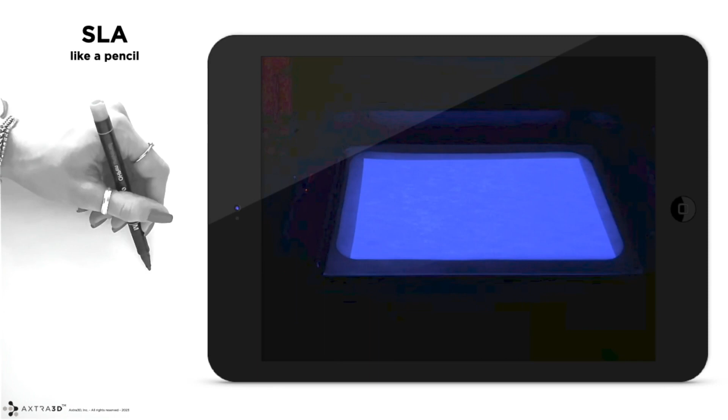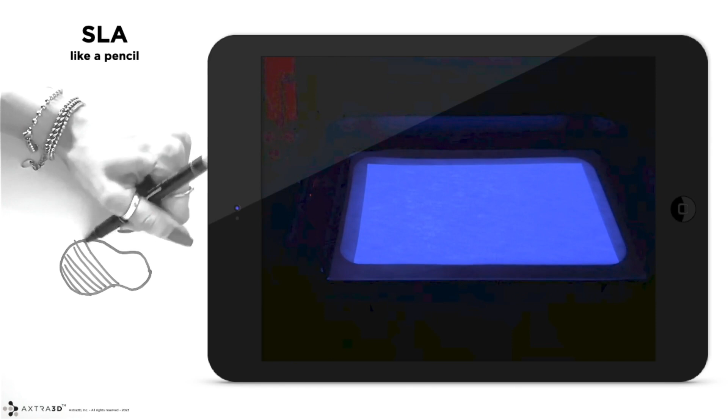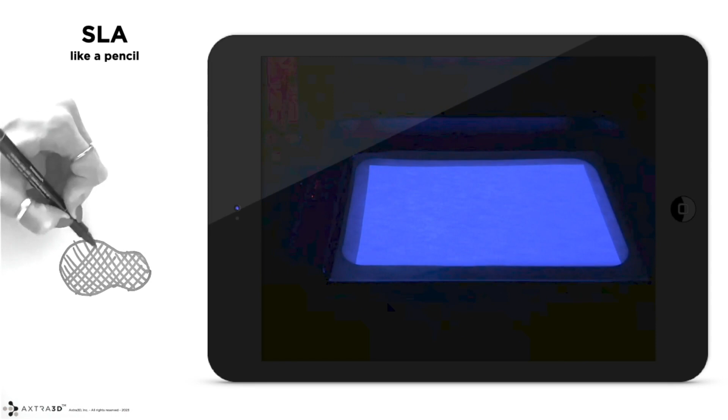Well, what is the meaning of the SLA technologies? Exactly like a pencil, we are using a laser to cure the entire layer. Which is the value of this technology adopted today? An amazing technology: we can use the laser to generate the contour of the layer we want to generate. What does it mean? That, exactly like a pencil, we can draw the contour, obtaining what you will receive in your hands, the surface of the 3D printed parts.

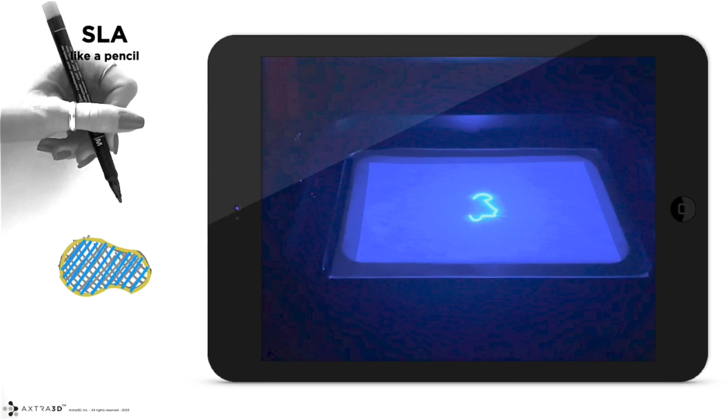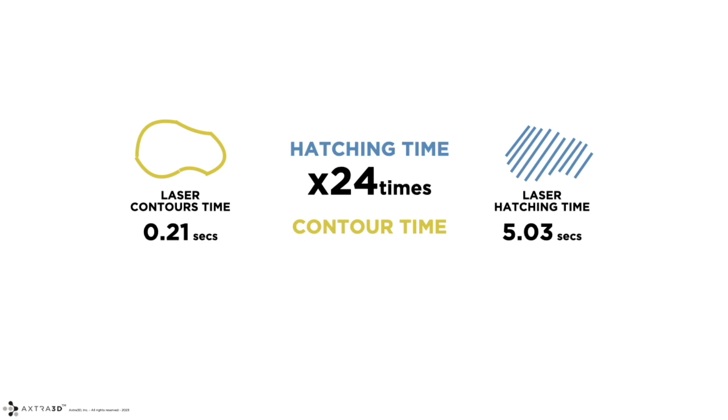But having only one light source, you are also obliged to use the same pencil, the same laser, to hatch the cross-section of your parts. The effect is that you have to spend a lot of time to generate your layer. This is a pretty important example. To cure this cross-section, you are spending 0.21 seconds to generate what you will have in your hands, what you will see, the surface of your printed parts, and you are spending more than 5 seconds simply to hatch the cross-section of your printed parts.

Well, you know very well, roughly 10 years ago, the 3D printing world introduced a completely new light source to cure the layer, what we call today DLP printers. DLP is a simple projector. What does it mean? That we are using this optical device to cure in one shot, only in one shot, the entire layer.

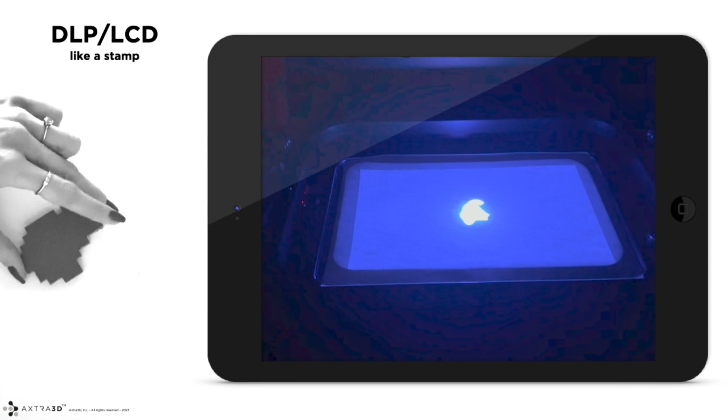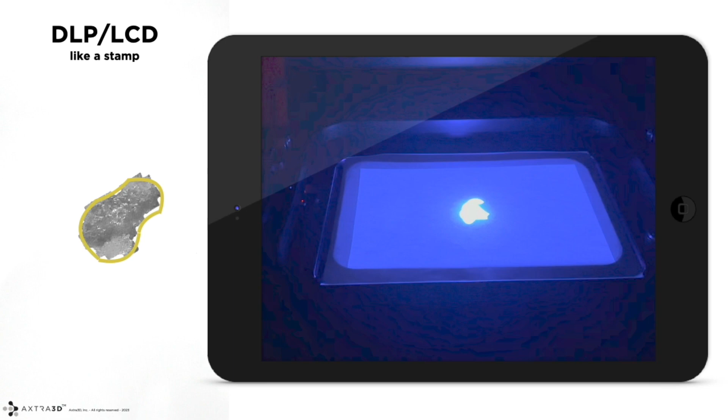Which is the value? First of all, a technology like this one we can call volume invariant. What does it mean? If you print only one part, or if you print more than one object on the same platform, the printing time will be the same, simply because you're using only one flashing phase from the projector, or today also from an LCD technology. Which is the problem? In general, the yellow line is what you want to obtain, but you are projecting pixels. So you are projecting a digital image. What does it mean?

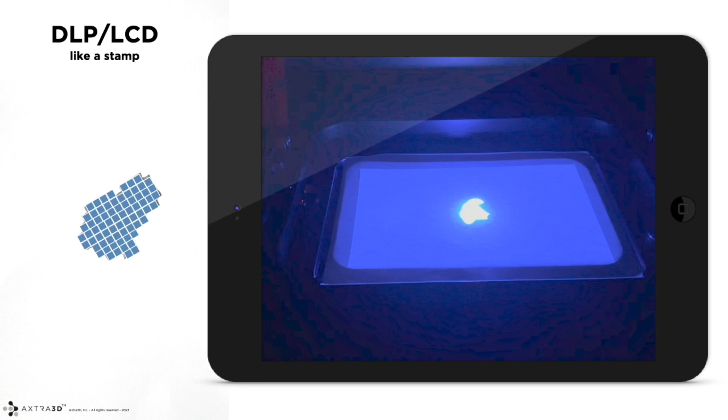The real effect that you will see in your hands is the pixelization of your surface. Of course, you can increase the resolution of your system, reducing the pixel size you are projecting, but on the other side, you are also reducing the final building area. Today we're seeing adoption of new projectors, 4K pixel shift projectors, or real 4K projectors, maybe tomorrow 8K projectors, but in any case this is a compromise that we have to accept.

On one side, in general, we have SLA technologies, a laser-based technology with an incredible resolution, with an amazing surface quality and part finishing. Also, the junction points using those technologies are extremely thin, simply because you can use a laser and the spot size of the laser is so small to generate the layers. But of course, those technologies are extremely slow.

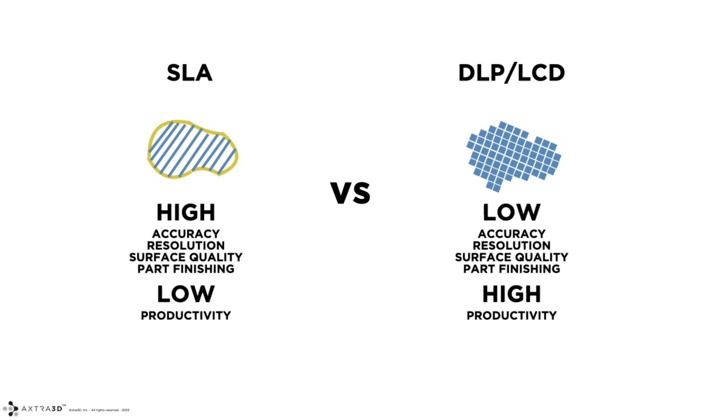On the other side, DLP and LCD technologies are extremely fast. So the productivity in this case is 10, 20, 30 times higher than a standard SLA technology, with the disadvantage that the resolution, the surface finishing and the part quality are lower than what you can obtain with an SLA technology. And another point, you also have to accept a compromise in terms of building area. Increasing the building area, you are simply losing resolution because the pixel you are projecting is bigger.

A couple of years ago, in 2021, we introduced a completely new light source, what we are today calling HPS technology, hybrid photosynthesis technology, and our LED engine. And this is the effect on 3D printing. This is for sure the most important slide that we will share together today. On the left side of your screen, you are seeing an SLA technology. Between two monitors, you will see the layer that we want to cure with, on the left, a standard laser, and on the right side, our new HPS technology.

So let's start curing absolutely the same layer, in this case simulating a really common resin on the market. We are speaking about roughly 3.5 to 3.8 seconds of curing time in a standard DLP technology. And you are seeing on the left side right now the scanner, the laser, curing, having the same effect on the polymerization, curing the layer, or at least an entire platform of objects that we want to print.

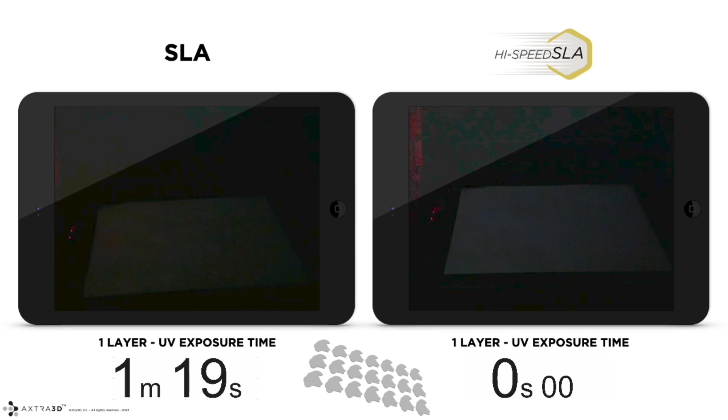As you can see, we are simply waiting, but the curing process, and only the curing process, is extremely slow, simply because we are using the laser not only for the contour, but also to hatch the cross-section of our parts. Now, on the right side, in a few seconds, you will see our new LED engine in action, curing the same layer, simulating the same resin.

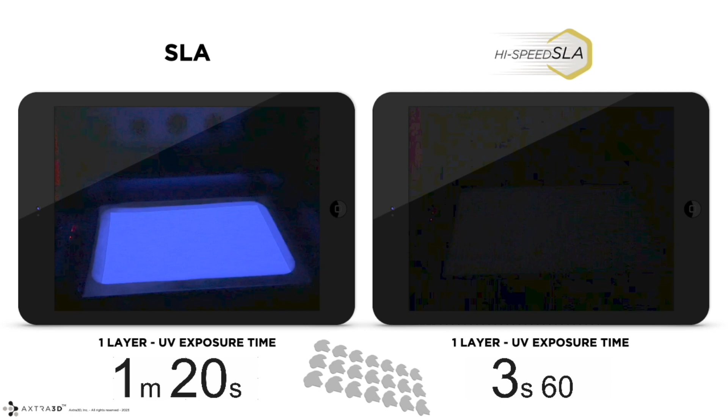So we are speaking about roughly 80 seconds for a standard SLA technology, and, following the curing time of this resin with a DLP projector, 3.6 seconds with our new HPS technology. That's the reason why we call this evolution of our work the end of trade-offs. Why? Because in general, with an SLA technology, with a laser, you can achieve an amazing quality, but the productivity of your device will be extremely low.

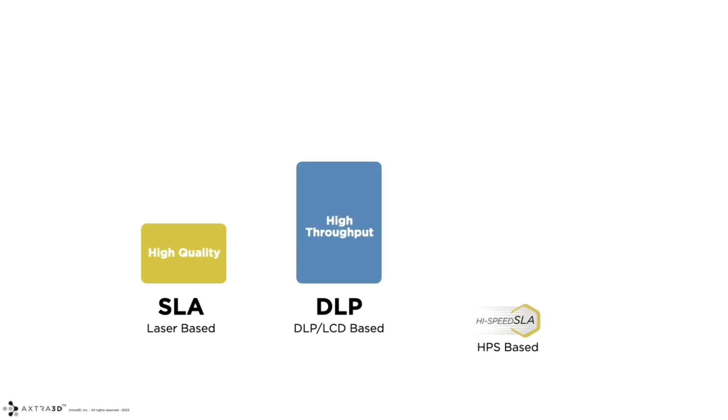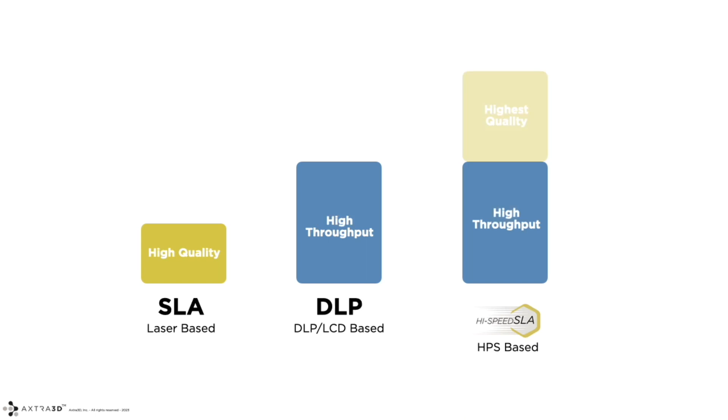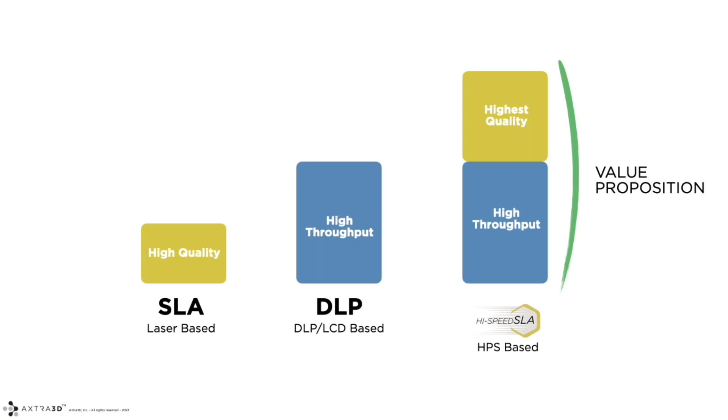On the other side, DLP: absolutely fast, the fastest printers on the market today, but low resolution devices. Today, with our HPS LED engine and our new high-speed SLA technology, we are combining both advantages: the highest quality, and you will see why the highest quality, better than an SLA technology, with the same throughput of a DLP system.

Now let's start entering into the description of our LED engine, of our optical device, and that's the reason why we're calling it why, not how, our LED engine works. In general, the idea to combine two light sources, obtaining both advantages, is not so new. For at least 10 years, a lot of inventors have tried to combine both light sources using two different strategies.

The first one is this one. What does it mean? That you can use the first light source, for example a projector, to cure the cross-section in one shot. And after that, using the second light source, a laser in this case, to cure the contours and obtain the best surface quality.

In general, this technology doesn't work, for two reasons. First, because you can't create the right crosslink curing the contour and the cross-section in two different moments. You can't obtain the right chemical crosslink between the contour and the cross-section.

And also the complexity in there, for example, using a mirror at 45 degrees to combine both the light sources with resolutions under 20 microns is a real challenge. So also the mechanical complexity is a real challenge.

Well, let's start describing how our technology works. This is a slow motion of the technology. As you can see, we are delivering in a real coaxial system both the light sources simultaneously with the same wavelength. As you can see here, now also the color. In this case, this LED engine is developed at 405 nanometers, simply because this is one of the most extended portfolio materials today on the market. But what you are seeing here is the HPS technology in action.

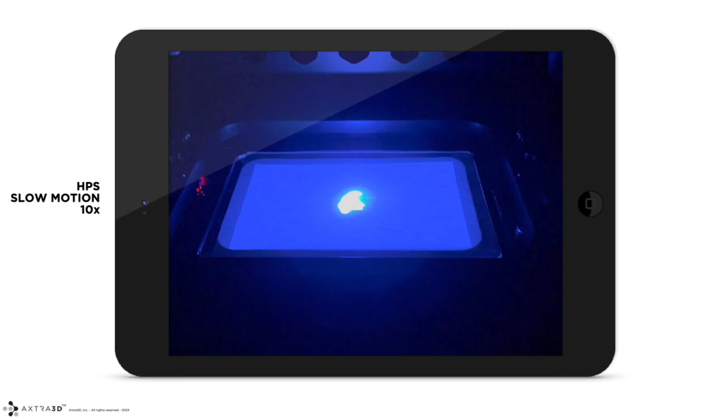So we are delivering simultaneously at the interface in a real coaxial system without, this is extremely important, without motion of mechanical components. We are able to deliver both the light sources at the interface using a very specific behavior of the light. In our case, it is very well known today, and I'm so happy to say that today our patent is a granted patent. We are using the polarization of the light to obtain what we are calling HPS technology.

What does it mean? That again, using a very specific behavior of the light, we are able to deliver at the interface the polymerization under the VAT in this case, but it's extremely clear that our technology and our light engine can be used for both top-down and bottom-up systems with different wavelengths, with different building areas. We are implementing a real coaxial system where our components are completely fixed, and that's the reason why we are able to combine both the sources with a resolution under 20 microns.

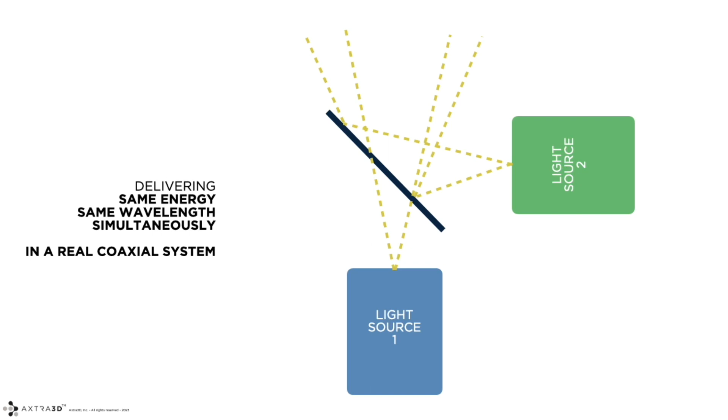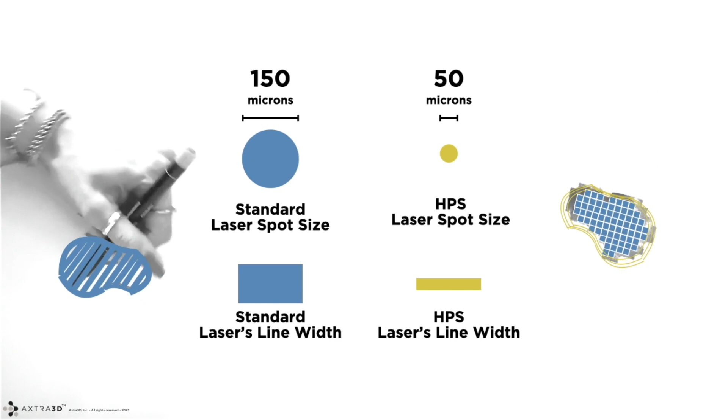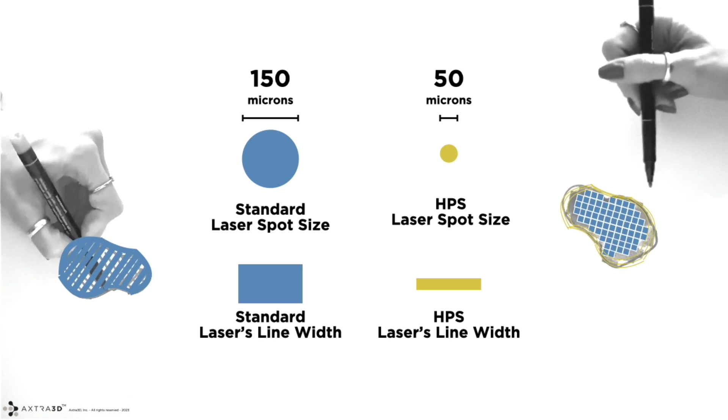But what is the effect in the real world? First of all, quality. Well, this is another trade-off that the old technologies have to accept. In general, when you design an SLA printer, you have to define a sort of compromise between the resolution you want to achieve, the minimal feature you want to achieve, and the spot size of your laser, simply because if the spot size is so thin, you will spend a lot of time for the hatching phase. So in this case, you are obliged to find the right balance between productivity and resolution.

In our case, the approach is completely different. That's the reason why today on Lumia X1 we are using a 50 microns laser spot size. Why? Because we are using the laser only to generate the contours. In general, 1, 2, 3, in the worst case 4 contours with the laser, because we are simply curing the cross-section using a DLP projector. So for us, the resolution of a projector theoretically doesn't mean the resolution of our system, because the resolution of our system is related to the spot size of our light engine. On Lumia X1, in this case, 50 microns.

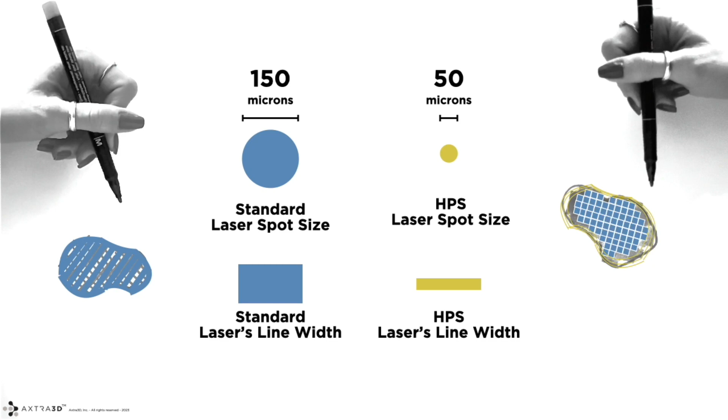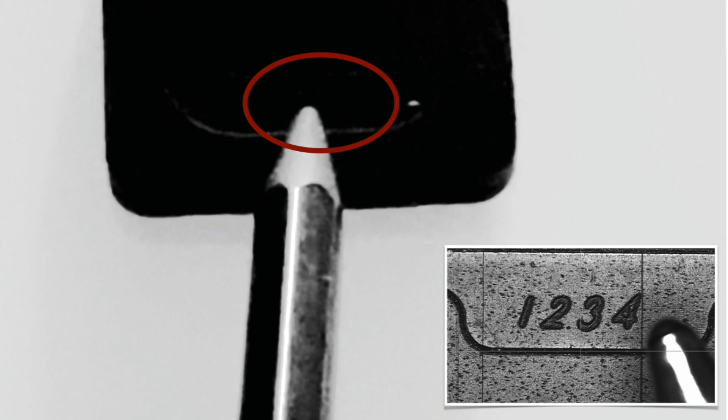But also resolution. Well, it's not only a matter of surface quality, it's also a matter of resolution. So when you listen on the market, well, I can use, for example, an anti-aliasing system on my DLP or LCD system to compensate the pixelization of the surface. Yes, it's true, but using a technology like this one, a software like this one, you are introducing noise. This is an extremely interesting result.

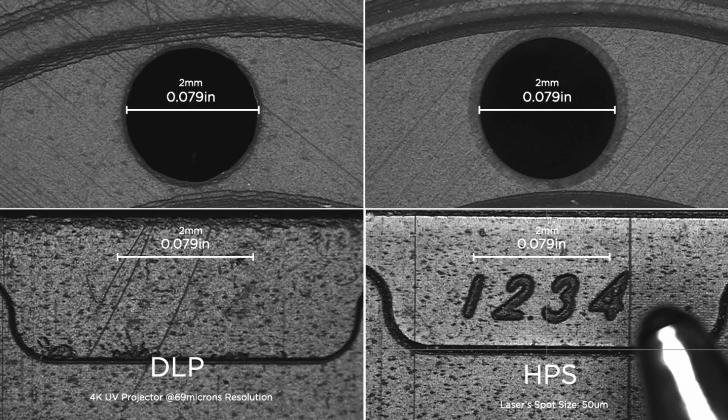This is a comparison between our light engine only with the DLP on the left side, so we are speaking about a 4K projector, 2K plus 2K pixel shift with 69 microns resolution, and on the other side, the same projector, also enabling our laser HPS technology, so delivering at the interface both the DLP and the laser. And this is the resolution. You can easily see on the right side the laser running all around the contours, the reason why we are able to generate now numbers 1, 2, 3, 4. For the entire string of numbers, we are speaking about 2 millimeters, and the thickness of every single number is 200 microns.

It's also a matter of surface quality. This is another application, printed in one shot. This is one of the nozzles we are using to show the difference between HPS and standard DLP technology. This part is printed with our Lumia X1. For the first part of the object, we are enabling HPS technology, printing with both a projector and a laser, and at a certain moment we turn off the laser.

The result is extremely clear. Again, we're speaking about 69 micron resolution, the pixelization of the surface with DLP. But of course, the curing time remains absolutely the same for every single layer in both HPS mode and DLP mode.

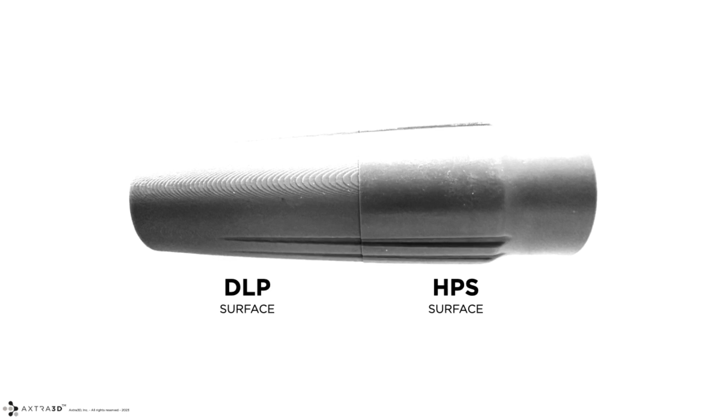It's also a matter of accuracy. You know very well that with DLP systems, you are also dealing with distortion of the projected image. Using HPS is not a problem, simply because the accuracy of our system is related to the accuracy of our calibration mask from the laser. So here we are speaking about 24 microns rotundity, and roughly plus minus 21 up to, in the worst case, 50 microns accuracy for the entire platform.

Again, simply because we are using our calibration mask to obtain the best accuracy from our laser, and matching it using a very specific slicer fully developed in-house, combining the cross-section using the image projected by the second optical device.

That's all from the technical development. Thank you so much, and see you in a few minutes.

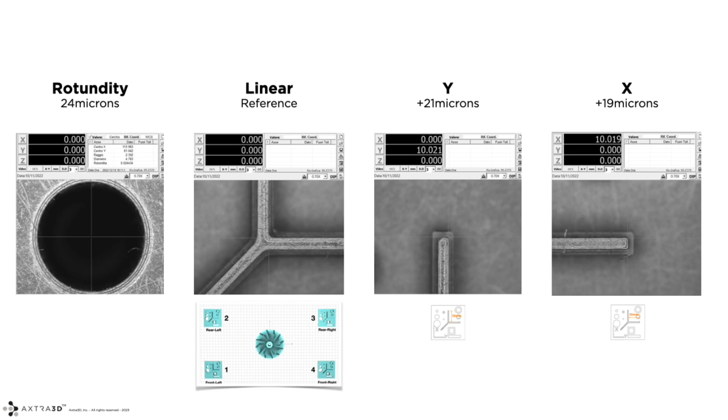Now we will start speaking about Lumia X1, our printer that we are implementing together with Paul, implementing the HPS technology. Thank you so much again.

Hey, I just want to give Gianni a big thank you for the technical explanation. Certainly, hybrid photosynthesis being a new technology allows for a lot of new possibilities in additive manufacturing.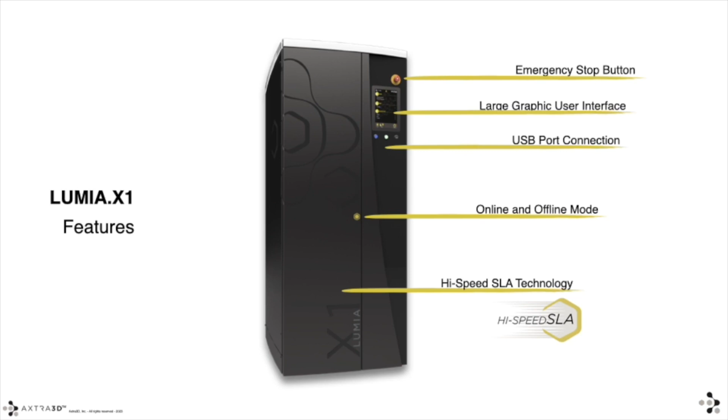So obviously, the Lumia X1 is the first machine to come to market with high-speed SLA technology, or hybrid photosynthesis. So we're extremely excited to debut this technology in the U.S. and in Western Europe.

Moving on, talking a little bit about some other features. Keeping in line with the industrial theme, we decided to implement a double Z-axis. This allows the printer to manage a wide range of materials, including high viscosity materials and filled materials. It also makes the printer a lot more robust than a single axis system, since you can manage forces that may be asymmetric under the platform during a print process. This is a key feature of the product, and one of the things that leads to increased reliability and printability. As you can see from this diagram, we also have integrated chamber ventilation.

This is a safety concern. We don't know every material our customers are going to be running, and some materials can be more toxic than others, so we wanted to outfit the machine so it's future-proofed and can be used for more exotic chemistries that may have more risk. You can hook this up to an active ventilation system, or even something like a HEPA filter for internal use.

This is also a class 1 laser device, so we've implemented a magnetic interlock safety system. User safety is one of our primary concerns, and you can see that implemented here in the design of the machine.

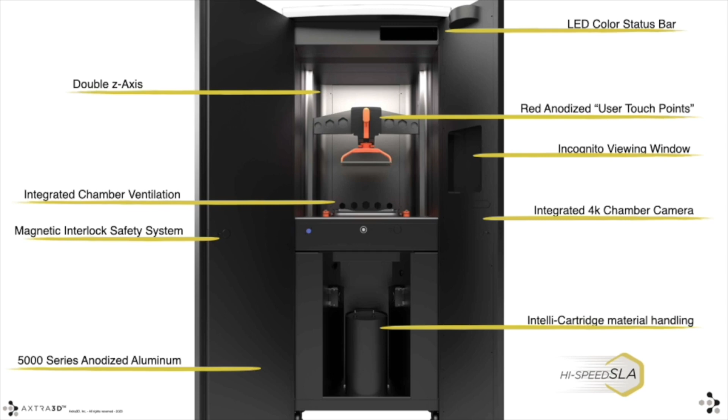You simply cycle it back on and start filling your vat again. This is a really exciting development, and we think it'll allow, especially where a customer is printing the same material over and over again in a production type format, it's going to save a lot of time and add a lot of convenience.

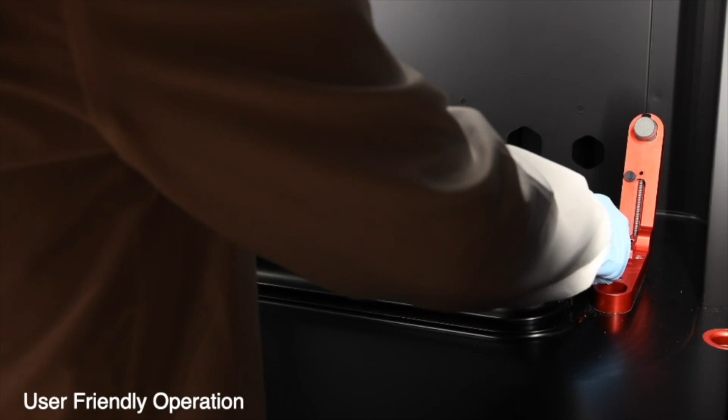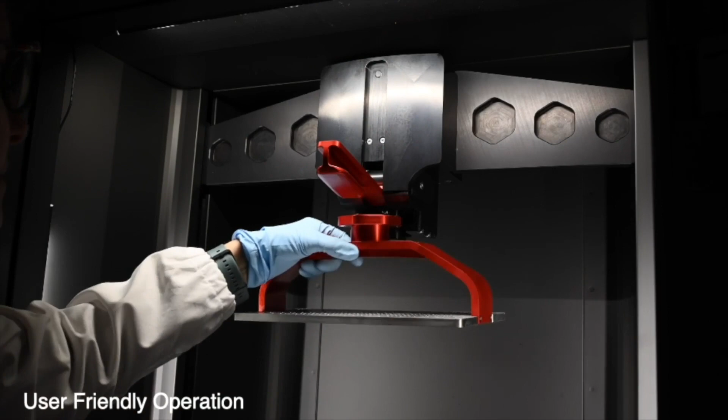I'm putting together a quick video of the user operation to show this. This is Gioia from our team in Vicenza, Italy, and she's demonstrating how you lock the vat in place. Also, this is how you open the bridge, so you can put the platform in and simply put the lever up to lock it in. Pull it down when you're done with your build, and voila.

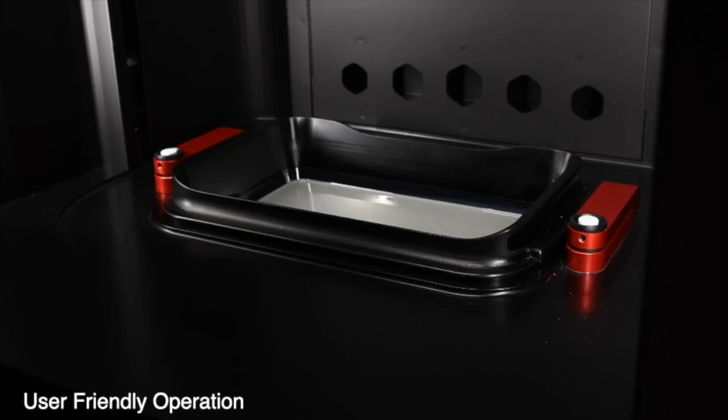Very easy operation. Honestly, one of the things that impressed me when I first saw this machine was how easy the user operation is. It's really designed to be very simple to operate.

All right, moving on.

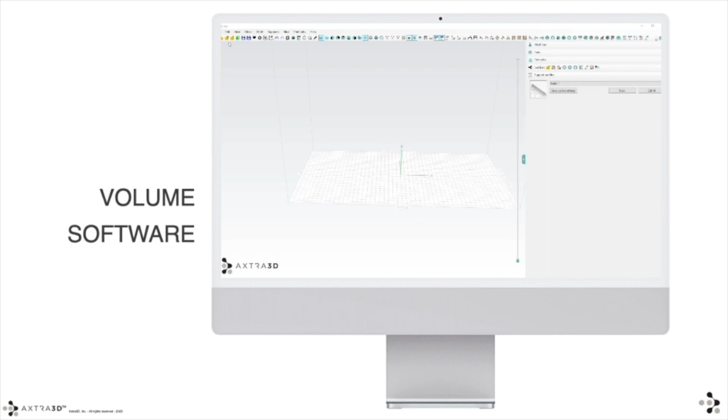No printer is complete without a slicer and software, so I'd like to introduce you to our Volume software. In general, this software is extremely capable, allowing all the main functions you'd expect from a print driver. You can bring different types of files in and orient them.

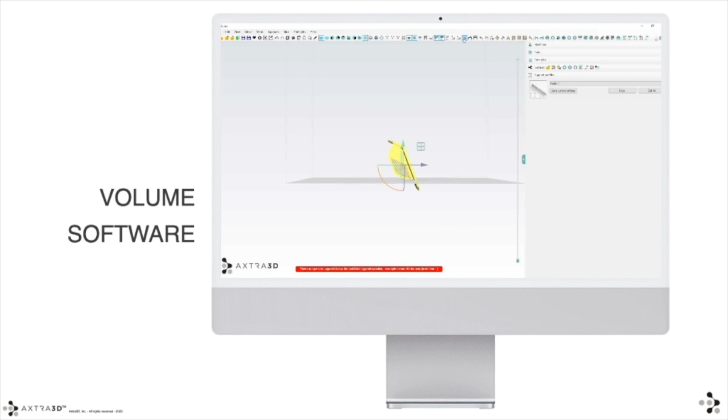By the way, we're also working with some strategic partners on the software side. So let's say you have eStage. If you wanted to use supports in eStage and then bring the whole file in here, that's absolutely fine. You can do that. We also have our own support options within the software.

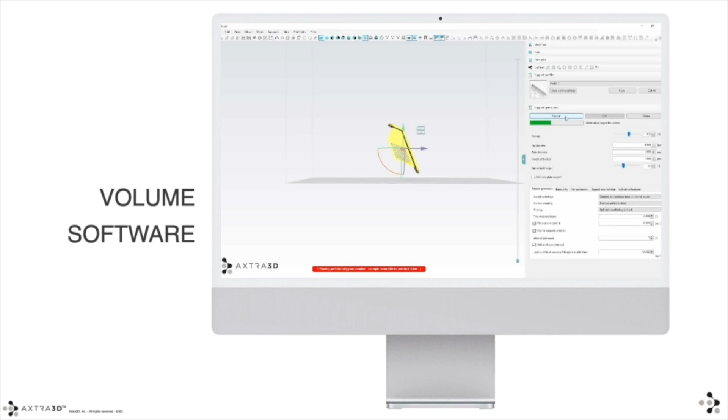Here those are. We have automatic support generation, which is pretty advanced. Sometimes it'll over-support a little bit, so you need to be fluent in making adjustments to the supports. Obviously, you can make copies when supports are done. You can build out a whole platform and finalize your orientation.

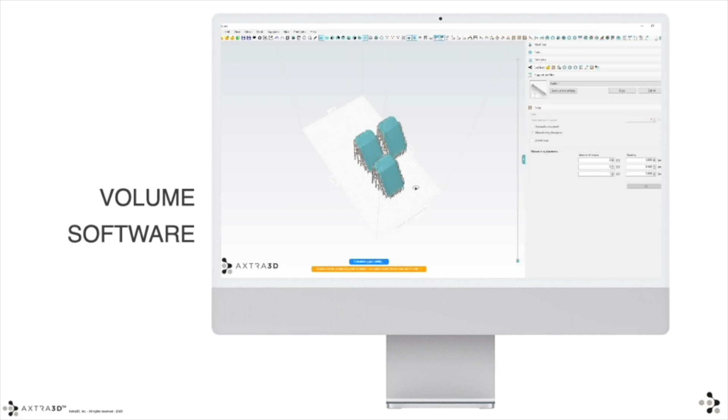There's also manual support options, I'll mention. There are different types of support structures that you can use and manipulate. So it's got a lot of functionality that we think customers will really appreciate.

Lastly, we can go ahead and slice our files and send them to the printer. While this is processing, I'll point out that since our light engine is so unique, combining the SLA and the image generator, our slicer is unique as well, because we have to manage both of those two different light engines on every layer. So the file we're producing is proprietary and unlike anything else on the market today, which is really exciting.

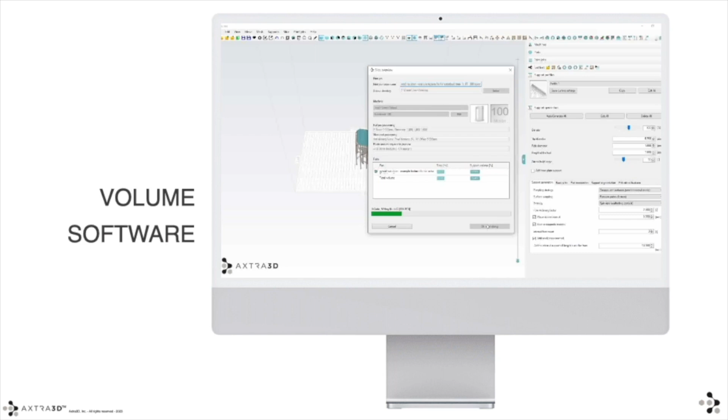Moving forward, we've gone ahead and sliced our files. Now we're going to go ahead and select the printer and send it to the printer via our software bridge, which is what you're seeing now on the screen. Once that's done, we simply go to print.

One of the most important things about 3D printing is materials, right? There's a couple complexities with it, in my opinion. There are some companies that have closed models where every single material they offer is from them. They've made it themselves, they're controlling the parameters, and they don't let customers control the parameters at all. Then there's also some hybrids.

There are some out there that will charge you a fee to have an open material license, or to have further control over parameters, and that fee can be in the range of $10,000 to $20,000. At Axtra, we really believe when you buy a printer from us, you should have full control. So I want to point out, we're open from a materials perspective. When you buy this printer, within our Volume software, you have full access to every single setting, and you're allowed to run any material you like, independently of Axtra 3D.

We've also spent a fair amount of resources and time developing what we feel are best-in-class build parameters for useful materials. So if you'd like to use those, you're obviously welcome to use those as well.

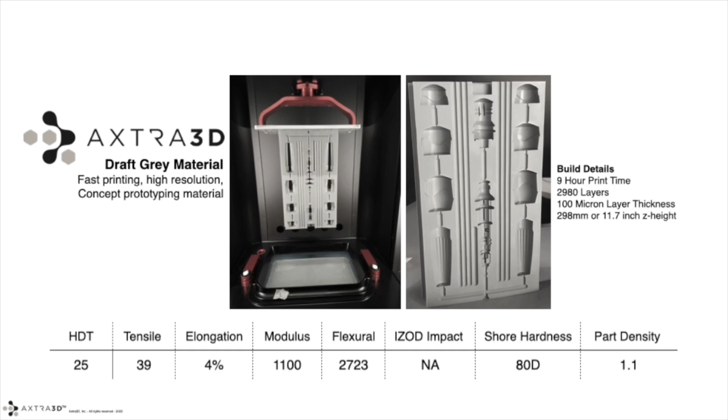This material isn't really impressive from a mechanical perspective. It sits there with an HDT of 25, tensile strength of 39 megapascals, pretty low elongation at 4%. But the reason we love this material is because it's incredibly accurate. The surface quality is second to none, and ultimately, for concept modeling and draft prints, this is a great material just to get the maximum value out of our light engine technology.

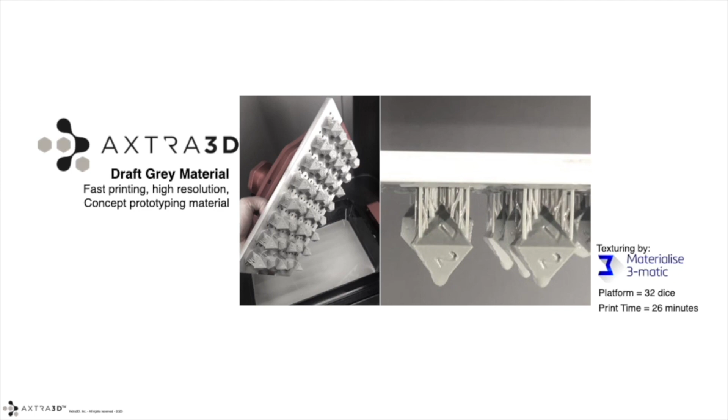Just another quick example of the Axtra draft gray resin printing some dice. Thank you Materialise 3-matic for helping us make these dice. That was a great little giveaway part that we did at a seminar, and we gave those away to all the attendees. So it was really cool. We were able to print 32 dice in 26 minutes, sitting on supports. So just to give you an idea of the printer speed, it's pretty fast.

We're also really fortunate to be partnered with Henkel Loctite. They have a nice material portfolio. This material has gotten a lot of attention in the market, and so 3843 is a really tough, high impact, semi-flexible functional material, great for functional testing. Also just has a really beautiful surface quality to it. HDT is at 63, so it's got decent heat deflection. Tensile strength is at 51, decent strength. 43% elongation at break, which makes it a really interesting material for functional testing, and just super durable, right?

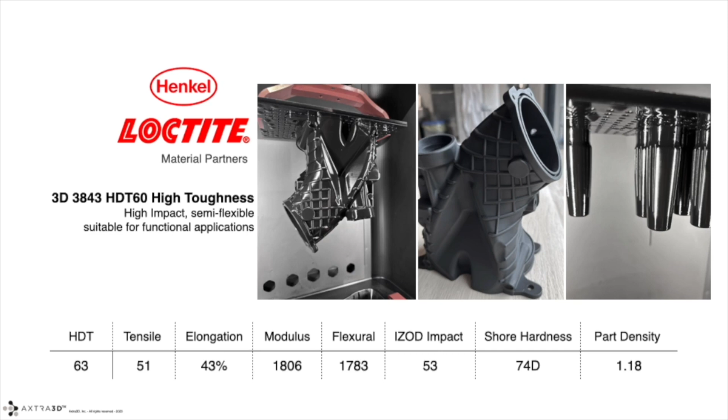Another material from Henkel that we're working with is the IND 405 clear material. From a property perspective, it's pretty impressive with a 53 HDT and 101% elongation at break. So this is another material we're interested in. It also has very good clarity right off the printer.

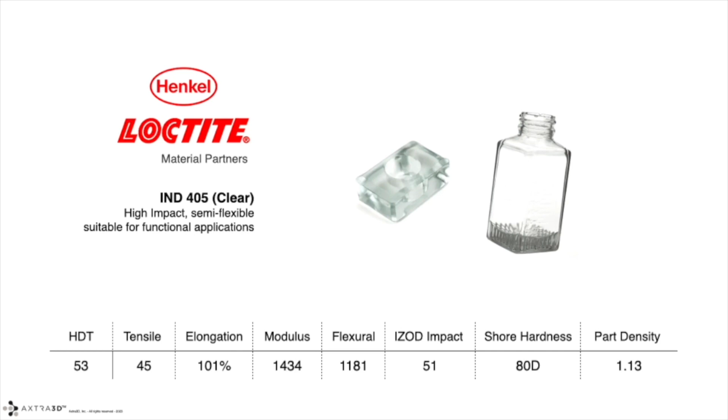Another partnership we're incredibly proud of and excited to explore further is the 3D Systems partnership. I believe we're one of the very few companies that 3D Systems has extended this offer to. So again, incredibly grateful to be working with the pioneer in the 3D printing space. And we're starting off with a Figure 4 Tough Clear material, which is really an amazing material. It absolutely could be used for end-use parts as long as it's internal. Has a nice long life, can handle some UV exposure, but ultimately giving you that nice round distribution of properties with about a 50 HDT and 13.1% elongation. And one thing we're really impressed with too is the resolution of this material. The shrinkage is extremely manageable, so we're able to print extremely high resolution and extremely accurate parts.

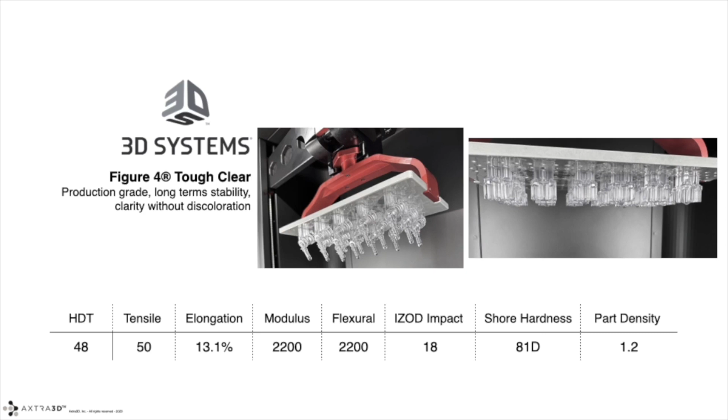On the 3D Systems note, we plan on adding quite a few more materials from their Figure 4 line. Next up, we have their Figure 4 AMB 300, which is a high temp material. Pro Black 10 is coming up as well. And many more. So really excited to see this relationship with 3D Systems grow and start getting some of these amazing materials out in the market on our Axtra3D Lumia X1.

Seems like we're working with a lot of amazing material providers. BASF, obviously they have a huge name. I think maybe they're one of the largest on the planet. And they came to market with this really interesting material called 3280, and it's a ceramic filled material with a very high HDT, very high modulus. And so we're looking at some really interesting applications here: injection mold tooling, inserts, also blow mold tooling, carbon fiber layup tooling. This could be used for wind tunnel models as long as it fits in our build area, which is pretty big. It's 9.8 by 5.5 inches by 20. So we think this could be a really interesting material.

Also, the cost of this material is considerably lower than competing materials in the market. And we're absolutely blown away with the performance. The exposure time on this material is less than 1 second, so it's an incredibly fast building material, and the accuracy we're seeing is sub 30 micron across the build platform. So super excited to see the new applications that we get to address with this new material. So if you've ever been looking at injection molding and been disappointed with results from different technologies, I highly encourage you to check this out.

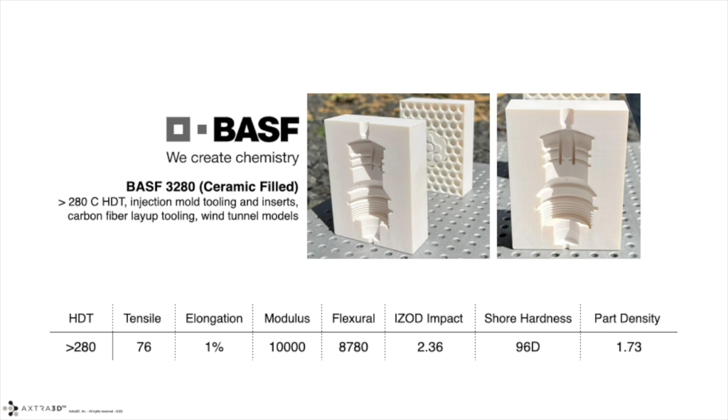Just to make sure we get the best from all the best, we also have a partnership with Evonik. They're a new player in the additive space, but we've been incredibly impressed with their formulation. This one in particular, the Infinam ST6100L, is an amazing material. It's got a high HDT of 120C, still with some elongation, so 6% elongation, pretty high modulus.

This is a material that we're exploring for connectors and other industrial applications, industrial housings. This is a material that's been designed for niche parts to be used as end use applications. So it all depends on your application and what your requirements are, but this is a potential fit for end use applications. And we're, again, super impressed with the print speed and the mechanical properties, and excited to grow our partnership with Evonik as well.

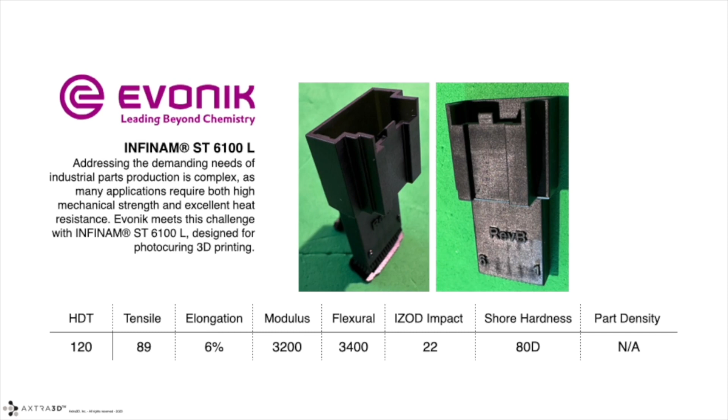So we're excited to see what jewelry applications we can get into, or for small medical devices, as long as the cross sections aren't too thick. The coefficient of thermal expansion would allow you to cast these parts in various metals.

Obviously, in the bottom up space, dental is an incredibly important segment, right? So here we're showing off our KeyGuide material from Keystone. Keystone's been a great partner to us as well. This is a really cool material because it offers biocompatibility. It's strong, easy to polish. It could also be put into an autoclave, which is pretty unusual for photopolymers.

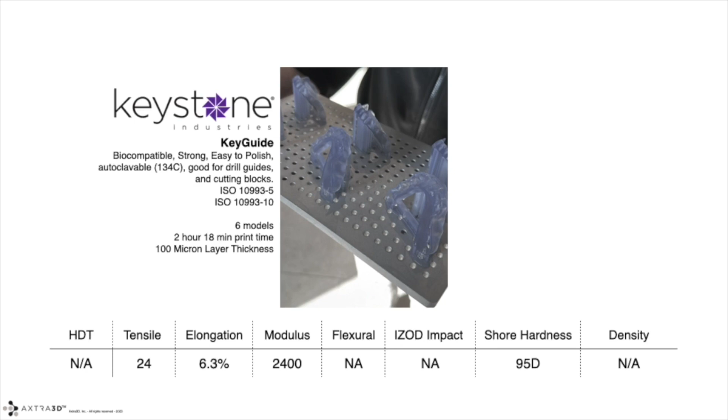It also passes the ISO 10993-5, 10993-10 regulatory body for biocompatibility. So really great material for drilling guides and cutting blocks, and also anatomical models as well. So definitely excited about that.

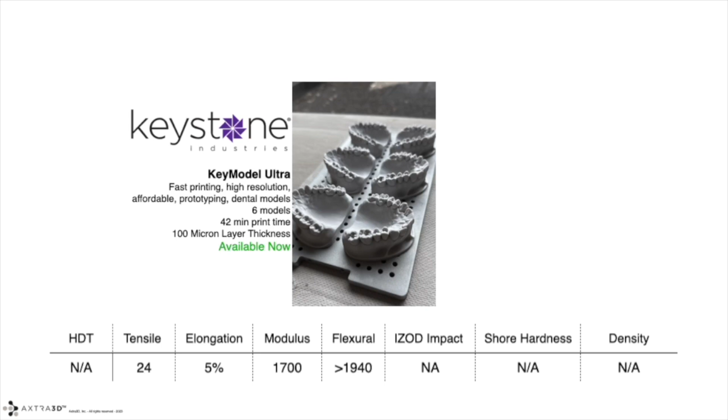And then as far as KeyModel Ultra is concerned, this is a great material for clear aligner production, also for general dental models, ortho models, prosthodontic models. And we have also this other KeyOrtho model, which was specifically designed for aligner manufacturing. I think both of them work well for aligner manufacturing, so it just depends on which color you prefer.

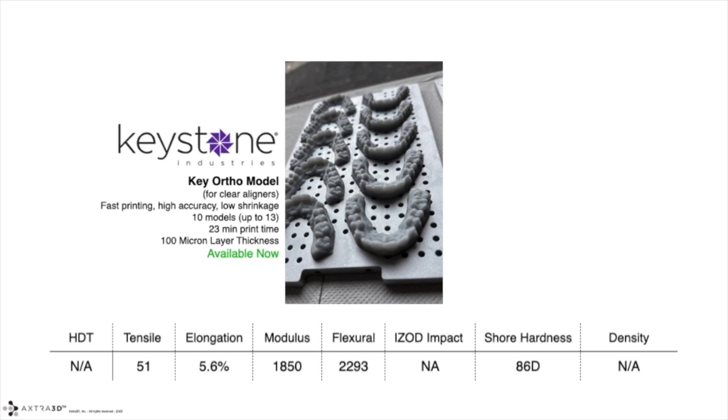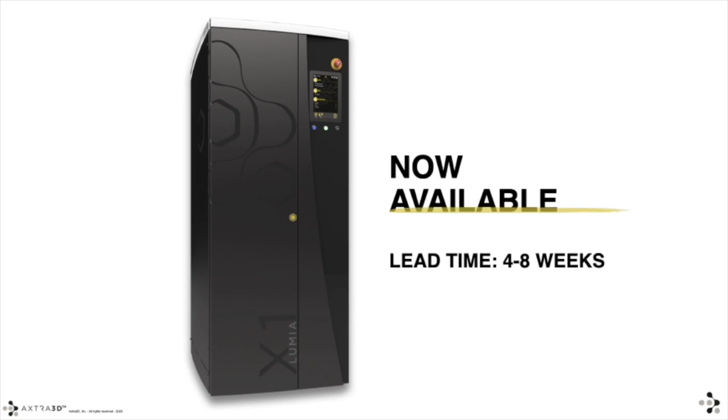All right, so at this point, I'll just say this. The Lumia X1 is coming to the US and Western Europe. If you think you have an application that could benefit from the combination of extremely high resolution, extremely high accuracy, amazing surface quality, and blazing speed as well, I really strongly encourage you to consider this machine.